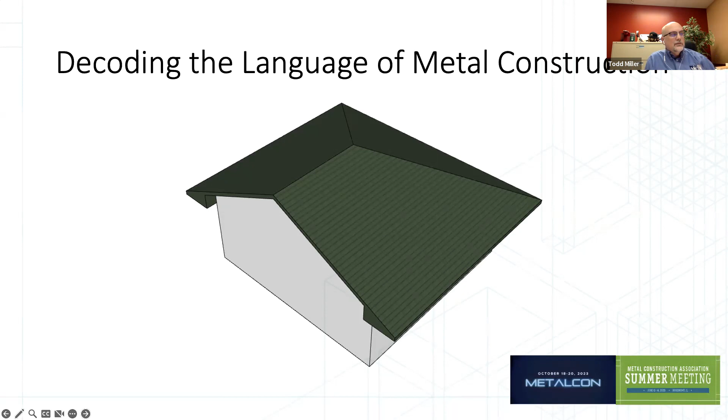As we go around the roof, we can start with some basic roofing terminology. Here you see some basic parts of a roof pointed out, some on top such as the hip, rake trim, eave trim, and ridge trim. But you also have areas underneath, like the soffit and the overhangs, and open gables which have overhangs and soffits as well.

There's something pointed out there called a cornice, and I hear those called about 10,000 different things—wraparounds, Victorian this and that. There's all kinds of terms used for some of those decorative areas that might be on a roof.

But then, in the field panel, at least in the metal industry, we either have a metal vertical panel or a metal shingle panel used in the field areas of the roof.

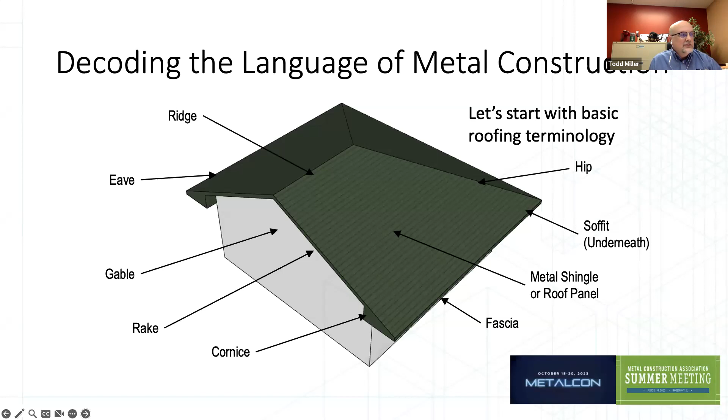Looking a bit further at the roof, on a hip and valley roof we're pointing out where the hips, valleys, and ridges are.

One thing I wanted to point out is that sometimes folks ask me, looking at a roof in a northern climate, what are those little pointy things at the bottom of the roof sticking up? Well, those are snow guards, and there also can be snow rails and different ways of doing that, but basically those are all systems of snow management. Metal roofs are fairly well known for shedding snow loads.

A lot of times what happens is you get a snow load on the roof and the sun comes out, generating a little radiant heat that passes through the snow, hits the metal, warms it up, and as it reflects back out, the snow load releases and tends to slide all at once—a bit like when your car engine heats up the hood and the snow suddenly lets loose.

But that's only if you're bad like me and you drive around with tons of snow on your car, which isn't the smartest idea. But anyway...

So we use these snow guards, typically staggered over areas of the perimeter of the roof you want to protect—you want to protect doorways to keep from blocking them, and you may also want to protect delicate shrubbery or statuary that may be in the firing range of snow sliding off the roof. So that's what snow guards are.

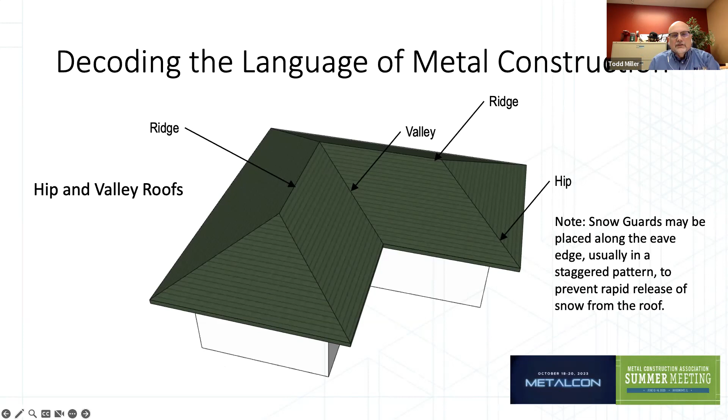So let's dig a little deeper here and look at the different types of metal roof panels. Again, some of these similar terms would apply to wall panels as well.

We're going to start by talking about snap lock standing seam. These are panels typically 12 to 18 inches wide, with a raised rib or raised seam—a standing seam—in between the panels.

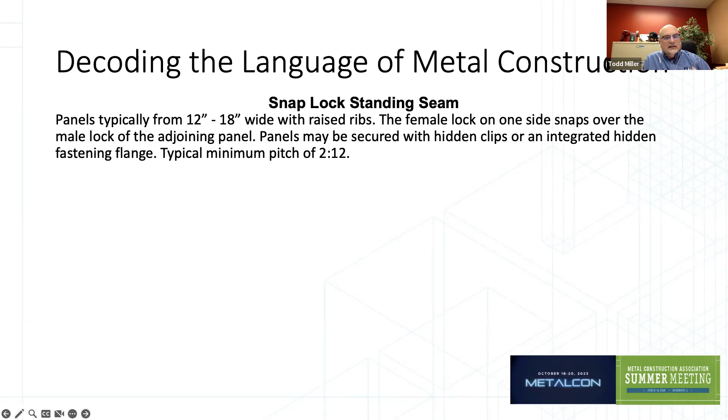When they're installed, the female lock on one side of the panel snaps over the male lock of the adjoining panel, and the panels may be secured either with hidden clips that attach to that male lock and are fastened to the roof deck, or some versions of snap lock standing seams have a hidden fastening flange with slotted holes that screws would go through. We oftentimes call those nail hems, but we don't really use nails through them, we use screws. Typical minimum pitch for a snap lock standing seam is 2 in 12.

But then we've got mechanical seam standing seam, very similar to the snap lock, except the panels are put on the roof, and rather than being snapped together, you run some sort of seaming machine, or old school guys do it with tongs, to mechanically fold that interlock into a watertight seam. One benefit of that type of seam is it can be watertight down to very low pitch, even as low as 1/4 in 12. These panels tend to vary a bit in width, probably on the wider end, maybe 16 to 20 inches for that type of panel. But once again, all the fasteners are concealed. A mechanical seam standing seam is going to have clip fasteners rather than that fastening flange I spoke of earlier with the snap lock variant.

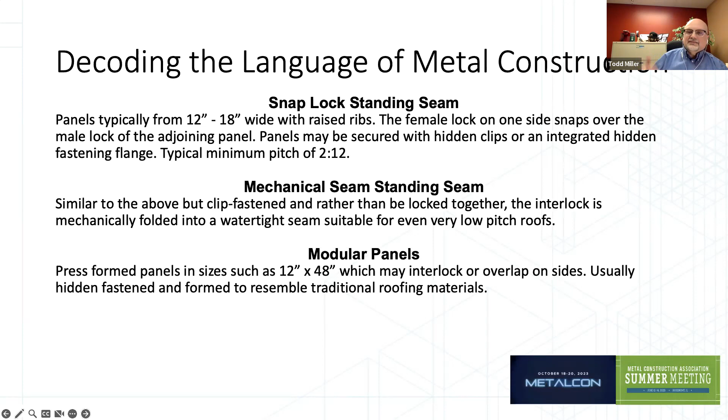So then we also have modular panels available in the metal roof industry, and these are actually press formed panels. There are a lot of different producers, and they all have different designs and dimensions. A real common dimension would be something maybe in the 12-inch by 48-inch range, so 12 inches top to bottom, 48 side to side. The panels either interlock or overlap on their sides. You've got some panels that interlock on all sides, some that overlap on all sides, and some that overlap on 2 sides and interlock on the other 2 sides, so a lot of variants out there. Usually with modular panels they have hidden fasteners, not always, but usually. And a lot of times these panels are press formed to look like more traditional roofing materials, stamped to look like slate, wood shakes or shingles, or even barrel tile.

And then finally, another type of metal roof panel, and I don't have these in any particular order, is what we call exposed fastener panels, or through fasten panels. These are basically sheets of corrugated metal in various profiles, like R panel, PBR panel, 5V crimp, other ag panel, and other profiles. They're basically secured to the roof with screws driven right through the panels. Those screws then have a rubber grommet or washer on them to keep water from infiltrating around the screw hole. So those are the 4 basic types of metal roof panels, and you get similar variants available on the wall side as well.

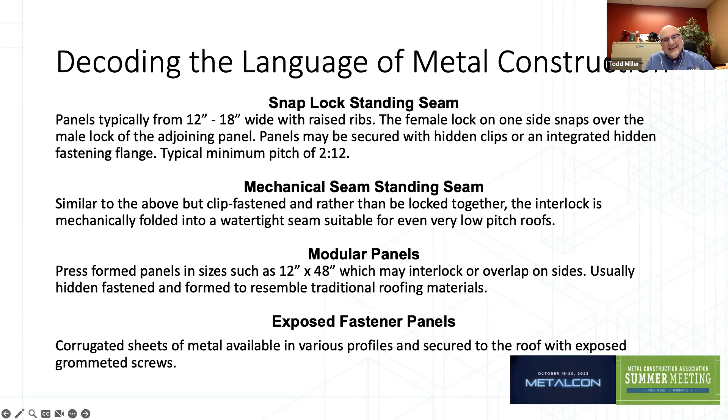A little bit larger term when looking at these types of panels is structural versus architectural panels, and you'll hear those terms thrown around on occasion. Structural panels are panels that do not require solid decking underneath of them, so they can literally span over the trusses and other structural members of the building. They can free span over those structural members without solid decking underneath. Architectural panels, also sometimes called non-structural panels, on the other hand, do require some sort of solid decking underneath of them.

So just for clarification here, most of the modular panels being made are architectural panels, meaning they do require solid decking. Solid decking, of course, can typically be wood, such as CDX plywood or OSB, or it can also be a metal deck. Another option we run into on older structures sometimes is the roof deck is dimensional lumber, but it's what I call closely fitted—the gaps between the boards maybe 1/4 inch or so, but there are no significant gaps between the boards. And then you've got battens.

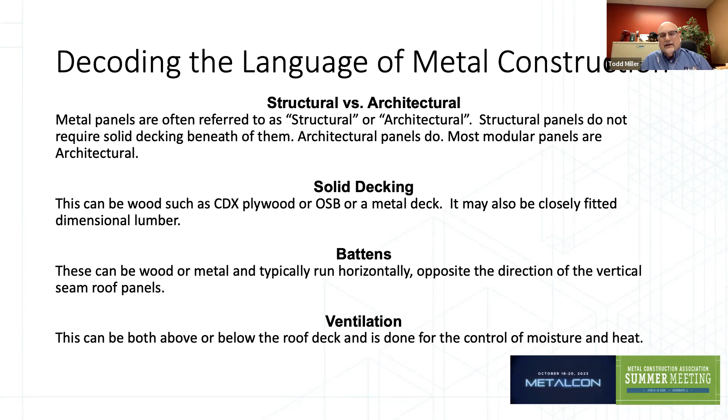Ventilation can be done above the deck, which we call above sheathing ventilation, or ASV. Or ventilation can also be the more typical setup, which would be ventilation in the actual attic space beneath the roof deck.

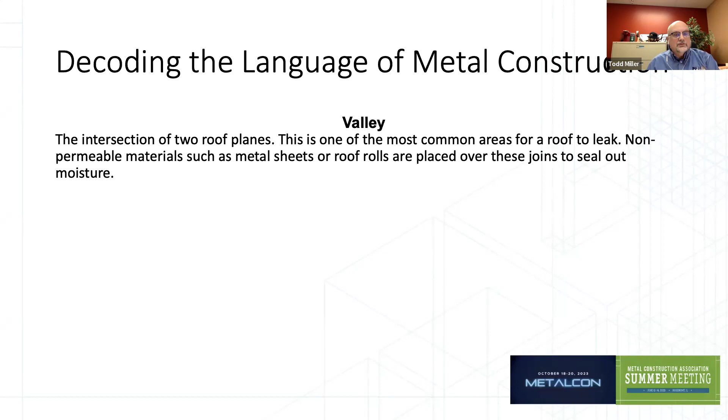A few other terms: valleys on a roof. The valley is the intersection of two roof planes, which we saw on that L-shaped building roof drawing earlier. Valleys can be a common area for roof leaks to occur, so typically on a metal roof they'll line that valley with some sort of matching metal that matches the rest of the roof. There are also a couple of variants of valleys: open valleys and closed valleys.

Open valleys typically have a valley pan put down and then a cleat on both sides of the center of the valley. The panels come into that cleat and lock over it. We call this open because everything's out in the open, nothing is concealed.

On the other hand, a closed valley is more like two J channels back to back in the valley that the panels are received into, or something like that. Closed valleys create a little bit of closure to help protect against weather, but the problem is they can also be prone to clogging with debris, since anything that ends up on the roof is going to end up in that valley eventually, just because gravity carries it there.

If you've got a valley system with closed channels, such as J channel type areas, those areas might collect debris, which could be tree leaves, pine needles, ice, or snow.

And then finally, we also have Death Valley. Oh wait, that's a really hot, dry place in Central California. That has nothing to do with roofing, although we do have dead valleys.

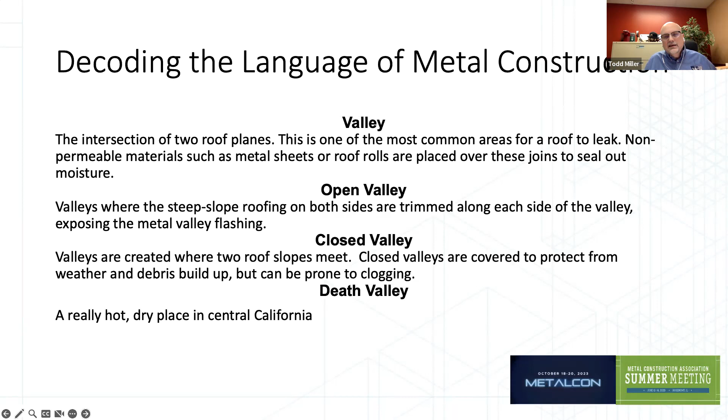Dead valleys are eave to eave situations, which can be nasty critters to work with. But again, typically you're going to line a dead valley with metal to match the rest of the roof. Ideally you'd put some sort of saddle or cricket in the middle of that dead valley to help push the water one way or the other, or perhaps both ways. And there's our Death Valley sign.

Let's look at some other terms. Flashing is really a generic term used to refer to pieces of metal used to keep water from going into a joint. So, for example, if you've got a roof that abuts a wall, or runs into a chimney, or runs into a skylight, those are areas where you're going to flash.

One interesting thing about metal roofing: a lot of times with traditional shingle roofs, you'll see flashing on walls called step flashing, small 8x8 pieces of flashing stepped down that protrusion, whatever it is. Typically in metal roofing, we actually use lineal pieces, so those would be flashed with a continuous lineal piece rather than those small step flashings.

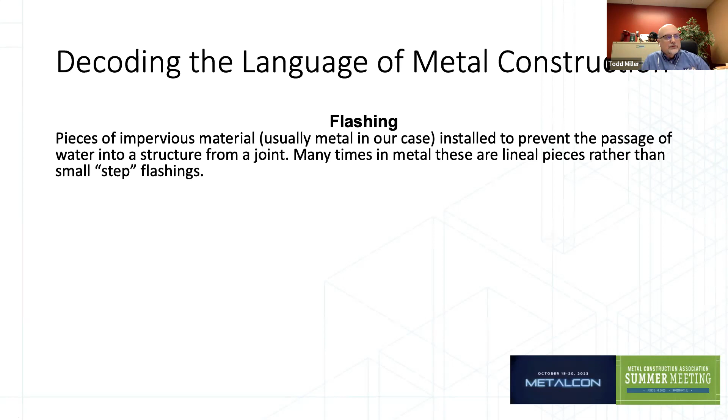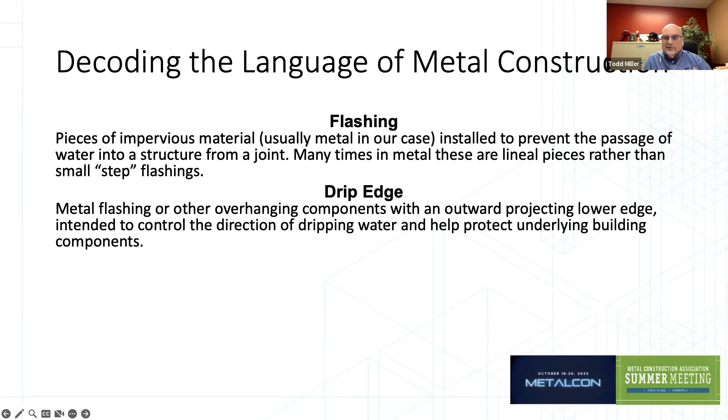Drip edge is at the bottom edge of the roof, basically to direct the water as it exits the roof someplace, hopefully away from the building. If there are gutters or some other kind of water control on the roof, the drip edge is going to direct that water into the gutters. Cleats, we'll look at a picture of those in a second, but cleats are basically a method of being able to put trims on a roof without any exposed fasteners.

Finally, I want to talk about underlayment. Underlayment is typically used on a roof being installed over solid decking, and it's a water resistant or waterproof barrier installed directly over the deck, underneath the roofing materials. It provides an added layer of protection in the event of severe weather. Sometimes metal roof installs take a little bit of time, so you want to make sure that roof is protected by a good underlayment.

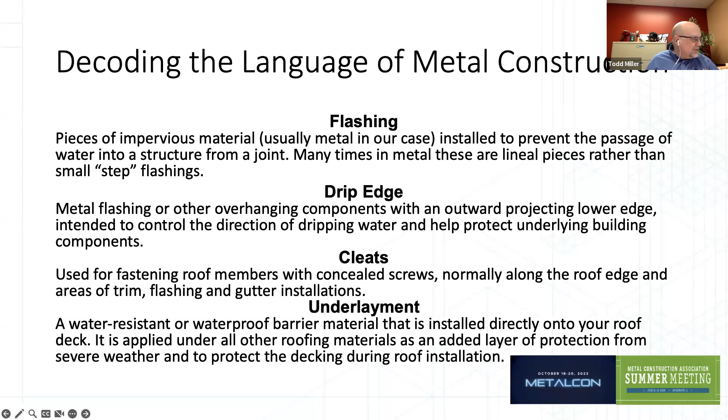During the process of installing the metal panels as well. A lot of the trend in metal roofing in recent years has been toward synthetic or polymer-based underlayments. These are still mechanically fastened, so you nail through them, typically using plastic cap or roofing nails. But they are not the old asphaltic felt underlayments, so they ain't your grandfather's underlayment, I guess you'd say.

We also often, as required by code, use ice and water shield around the perimeter of the roof, maybe up the valleys, maybe even up the gables. One of the very important things with ice and water shield beneath metal roofs is to use a smooth surface or a rubberized surface ice and water shield, not a granulated or sanded surface underlayment.

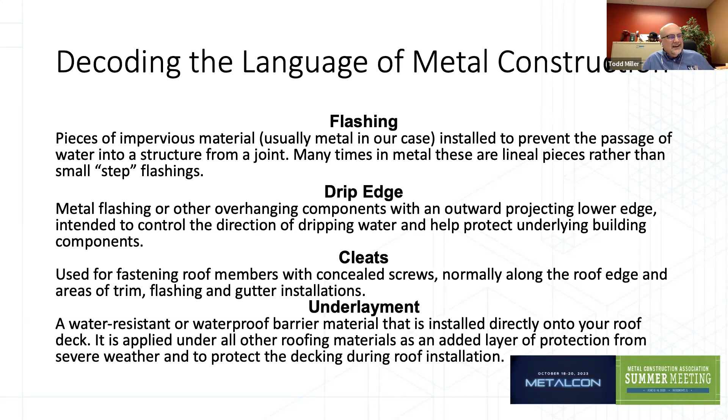The problem with granulated and sanded surfaces is, as the metal panels sit there and expand and contract with some thermal movement against that abrasive surface, it's going to scratch the backside of the metal roof, which could cause problems down the road. So you want to make sure your underlayments always have a smooth surface. Another reason is you want to make sure your metal panels don't end up sticking to the underlayment, because with expansion and contraction, it could tear it or cause it to bunch up.

So here's that cleat deal I was talking about. Nice drawing here Bob made with an eave detail where they've got a cleat. You see that lower piece there that the screw goes through, being driven into the fascia—that is the cleat. And the drip edge snaps over the cleat on the bottom edge. The drip edge is screwed into the roof deck in a concealed area. This allows you to have a nice drip edge with absolutely no exposed fasteners, and it's held firmly in place, which helps a great deal with wind uplift, making sure the drip edge doesn't blow up on you and cause wind infiltration problems.

Hey, thank you, Todd. If you just back up one slide, I did want to point out one thing.

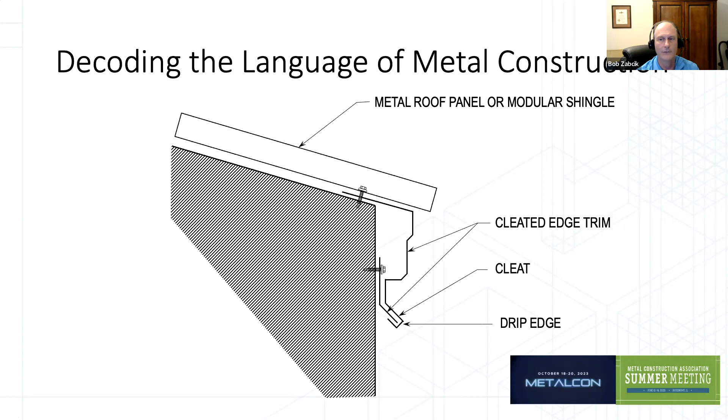Cleats are important, as Todd said, not just to conceal fasteners, but they also provide a means to address linear expansion and contraction without creating a binding situation at the fastener. I also wanted to mention, and this is my fault, I'll own it and fix it, but I've got the arrows swapped. The cleat is actually pointing to the cleated edge trim, and the second leader for the cleat edge trim is actually pointed to the cleat. So I'll fix that little hiccup in the slides here. That's one thing I wanted to point out, so thank you for that.

And yeah, I was going to get into the underlying materials and talk a little bit about paints and finishes. This stuff has been, it's old terminology in this industry. We've used it forever, but it's funny that as we've gone along, some of these definitions may not be exactly what you think.

Gauge is a good example of this. I've very carefully worded this definition: a numeric identifier for steel less than 3/16 of an inch thick, and that's actually called out in a couple of different standards. Above 3/16 inch, you use the thickness expressed in fractional inches, but below that you use this gauge identifier. A smaller gauge number means a thicker steel, and I've got some examples on the next slide. Also, gauge represents the thickness of the uncoated steel—the metallic and paint coatings add to this.

Now, what is not called out here is that there is actually not a consensus-based written standard that says 26 gauge is equal to X millimeters or fractional mils or fractional inches. That does not exist. A big reason why is that although 26 gauge from different manufacturers is generally very close in decimal thickness, they won't match exactly. The reason is that when this terminology was evolving, there were really two main steel manufacturers in the United States, US Steel and Bethlehem.

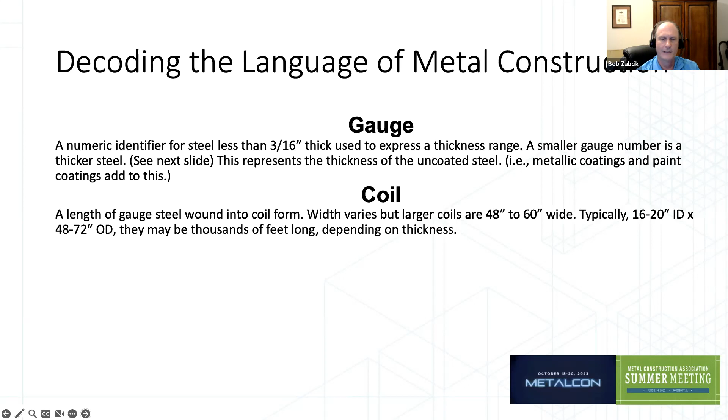But we're talking about the base coils here - usually an interior diameter of 16 to 20 inches, an outer diameter of 48 to 72 inches. If you do the math on that, we're talking about materials that are 0.025 to 0.03 inches thick. That's a whole lot of material - they can be thousands of feet long rolled up.

And then there's flat stock. Also sounds obvious, but there are some interesting things you may not be aware of. Most flat metal panels come from flat stock, but flat stock comes from coil. And when you wind coil, those dimensions - the interior diameter and outer diameter - are carefully chosen based on the thickness of material, so that the interior winds of that coil don't actually reach the elastic limit, and there shouldn't be any memory.

In other words, the coil trying to take back its round form. But of course, if it sits in a banded coil position long enough, it will have some memory to it. So you actually have to decoil or flatten material for flat stock - we do that in an inline process in this industry quite often. That's really the difference between gauge and how these three interrelate: gauge material, coil, and flat stock.

We'll ship flat stock to make special pieces in the field, or we'll make unique boxes, trim boxes, cornices, like we saw earlier, out of those materials instead of from coil. Coil generally is used to produce panels or some type of blank for other pieces of material made from it. So some of that terminology does cross over - that's why I wanted to bring that out.

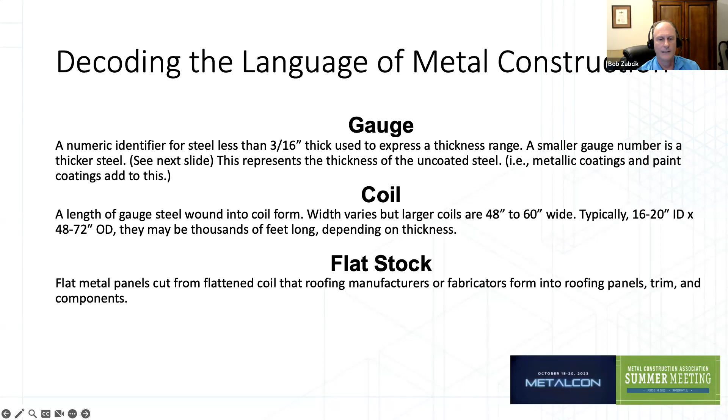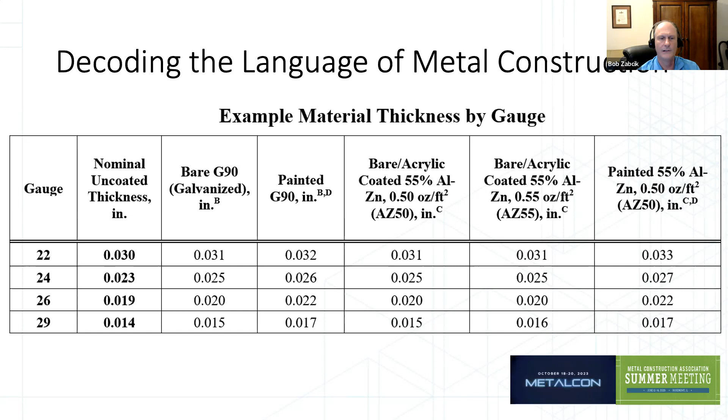The base material thicknesses are generally speaking the same, and that's what the dark numbers are. But when I add the different coatings and materials to them, I get different thicknesses based on what that coating is. This just shows you how that varies versus the most common gauges we see in this industry, which are 22, 24, 26, and 29 gauge. Again, these are decimal inches here - you could convert those to millimeters if you want.

And those coils, generally speaking, are either bare, galvanized, or galvalume, or they're painted - which leads us to our next term, Kynar.

So a little multiple choice for you. Is Kynar, on Star Trek, a cross between a Klingon and a Vulcan? Is it a paint system typically used on top of galvalume or galvanized steel or aluminum, widely recognized as a high quality finish, usually carrying a chalk and fade warranty? Or C, a small island in the southern Indian Ocean? If you can't get this one, I can't help you.

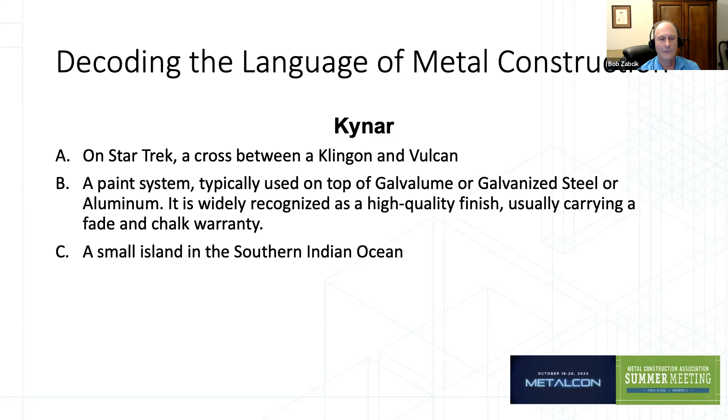The answer here is obviously B. But just for grins, I wanted to put that out there, because when I see the word Kynar, those are the two things that popped into my mind: a Klingon and a Vulcan - it kind of fits together. So there you go. Gotta love Spock - he's one of my favorite characters on any television show or movie ever.

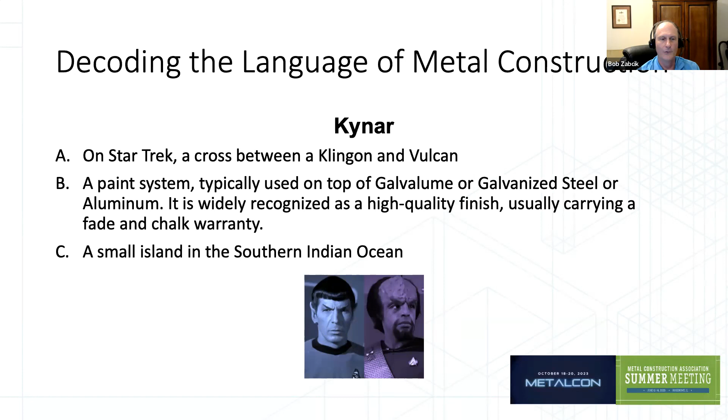All right, next slide, please.

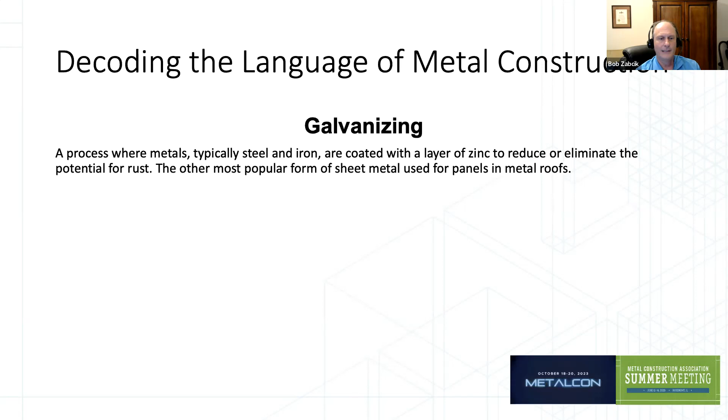So I've talked a lot about galvanizing and galvalume a little bit. Let's just talk a little bit about metals in general.

We've all probably heard the term similar or dissimilar metals. I haven't put those in the slide here because hopefully you remember from high school chemistry what those are. But really what it comes down to is dissimilar metals are metals which, when put together in the presence of an electrolyte, a liquid media able to transmit electrons, generate some type of corrosion. Similar metals, when put together in an electrolyte, there might be some corrosion, but the two metals don't assist each other in their respective corrosive processes.

That's really one of the key things we're accomplishing with galvanizing. It's typically a process where metals, typically steel and iron, are coated with a layer of zinc to reduce or eliminate the potential for rust. Maybe most people know this, but in case you don't, zinc is a sacrificial coating, which means the zinc corrodes instead of the iron. This is what makes it very widely used for exterior applications, like sheet metal used for panels and roofs.

Now, we generally don't use bare galvanized in most commercial products. Ag products, we do use a lot of bare galvanized. There are actually times, certain corrosive environments, where bare galvanizing actually works better, but those are pretty unique and rare. Generally speaking, when we have plain zinc galvanized material, we're coating it with a Kynar or some other type of paint system.

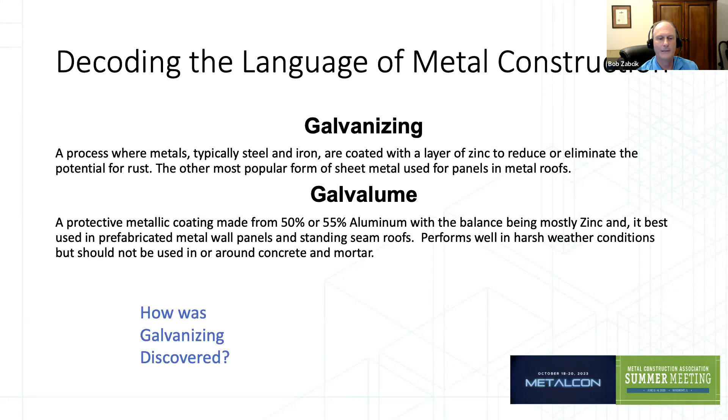So that's the process of galvanizing and how dissimilar metals work. There's a very interesting story here - I'm going to get a little off topic, but I think you'll find this interesting. As far as I can tell, it's true. I've done a lot of research, and I think this is commonly accepted.

This gentleman, his name is Luigi Galvani - excuse me - he was an Italian chemist in the late 18th century, about 1780. You know how these days, if we have a sick loved one, what do we do for them? Chicken noodle soup, right? Well, I guess if you're a chemist in Italy in 1780, you don't make chicken soup, you make frog soup.

I've had turtle soup, I've never had frog soup, and honestly I'm not going to rush out and try it. But supposedly it has great healing powers, or at least was thought to at the time. So being the doting husband that he was, Mr. Galvani runs out and grabs some live frogs from a local market, brings them to his house, and harvests the legs off the frogs. He skins them and puts a little salt on them - probably not to season them, but to dehydrate them.

Then he hangs them up - and this is where it gets pertinent - on a copper wire against his window. That window was open, but it had iron bars on it. Well, copper and iron are dissimilar metals, and of course there's salt and moisture on the frog legs, so we have an electrolyte. Lo and behold, the wind starts to blow, and the frog legs touch the iron.

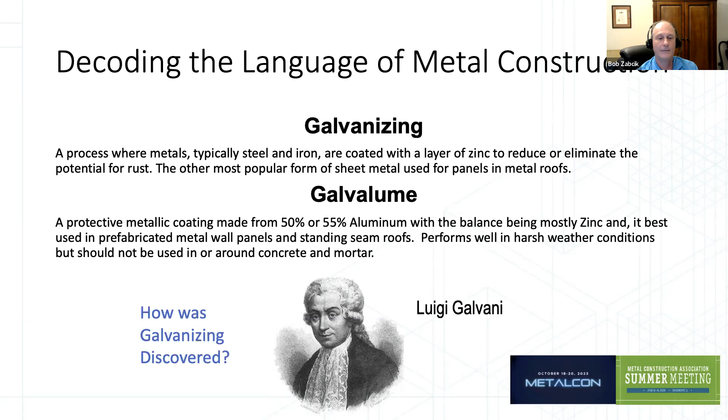There's some useless information you can pass on to your kids at dinner time - and go try frog soup, who knows! So with that, Todd, I'll turn you over to cover some manufacturing terms, and then as I understand we're at about 20 minutes to go, so I think we're doing all right on time. When you're done, Todd will kick this back over to me and I'll get into some of the more common acronyms we run into, and that should bring us on home. So please take over, Todd.

Thanks, Bob. I don't know if I have to live in a world that's powered by frogs - I think maybe I'll live without power. I did realize, though, I missed my perfect opportunity when you asked what do you do when a loved one is sick. I really should have said I check and make sure their insurance is paid up. Yeah, bingo - completely missed that one.

Okay, let's look at some others. Oh, we got another multiple choice here. So, what is a reverse bend?

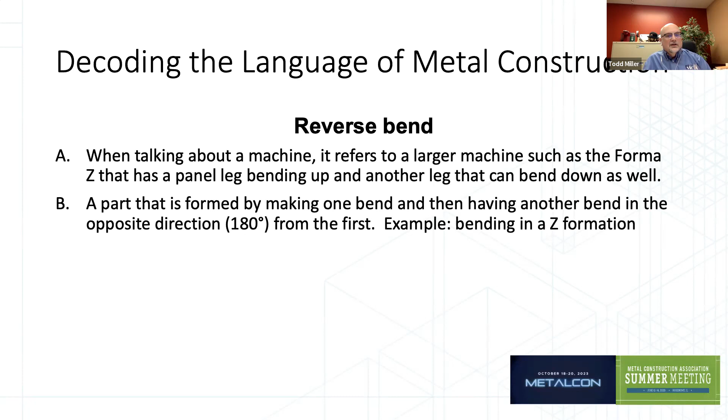Could it be A, when talking about a machine that offers reverse bends? It refers to a large machine, such as Schlebach's Forma Z, that has a panel leg bending up and another leg that can bend down as well, so there's double folding action going on. Or could it be B, a part formed by making one bend and then another bend in the opposite direction, such as a Z formation? Or could it be C, a road that turns suddenly more than 170 degrees? Well, the correct answer is actually D.

It could be both A and B for reverse bend. So it's a particular type of machine, but it also refers to a particular product profile or trim profile as well.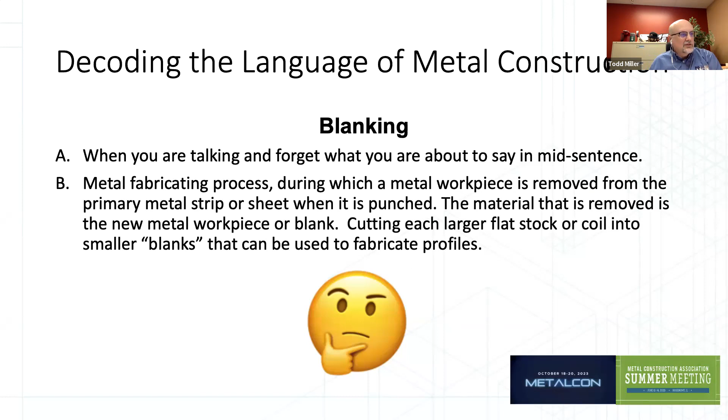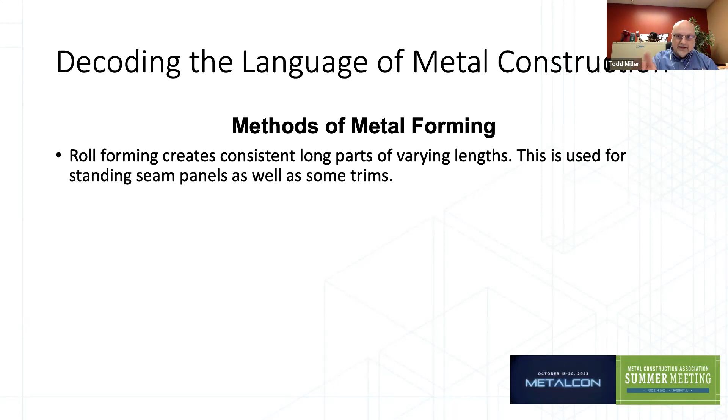So let's look at methods of metal forming. There are three primary types of ways in which metal is formed. One is roll forming. Think of that guy who brings a seamless gutter machine to your house and rolls gutter out of a continuous coil of metal - that's roll forming. Roll forming creates consistent long parts of whatever length you want, and oftentimes the machines are programmable. Roll forming would be the method used for standing seam panels as well as some trims. The big thing with roll forming is everything is lineal - it's one direction, one straight consistent part.

Another method of forming metal consists of press brakes, folders, or hand brakes. These are used to create specific length trims by putting a blank into it and then bending it as needed. Compared to roll forming, a press brake or folder can be programmed, or a hand brake can be manually operated, to create pitch-specific parts or even tapered parts. With a roll former, everything is one dimension, continuous long parts. The variety we get with a press brake is the ability to do more customized parts that may be specific to the pitch of the roof, and maybe tapered parts - you may have valley pans that are tapered so that one can nest into the other when lapping valley pans up the length of a valley.

The last method of metal forming common in our industry is stamping. These are large, high tonnage stamping presses used for producing various modular panels, as we call them - the various metal shingles, slates, and tiles we talked about earlier. There is tooling put inside the presses that creates those parts. The tooling may be transfer tooling, where parts have to be mechanically moved from one die to the next between hits. Or tooling can be progressive, where the part stays connected as it goes through the various stations of the die until the final finished product gets cut off at the end and thrown out of the machine at some ridiculously high rate of speed. Well, it does happen sometimes - so you've got a catcher on the end to catch those parts.

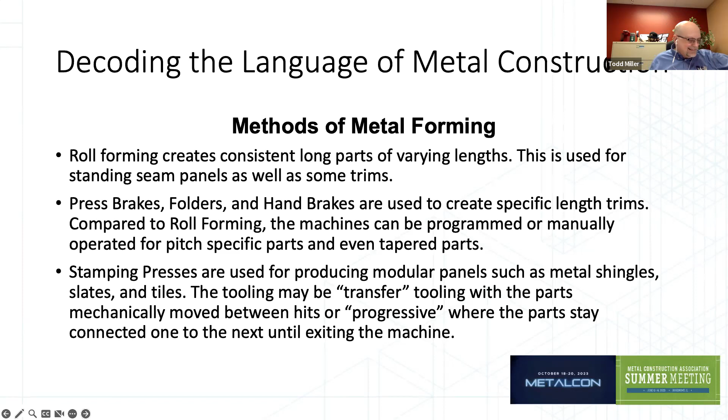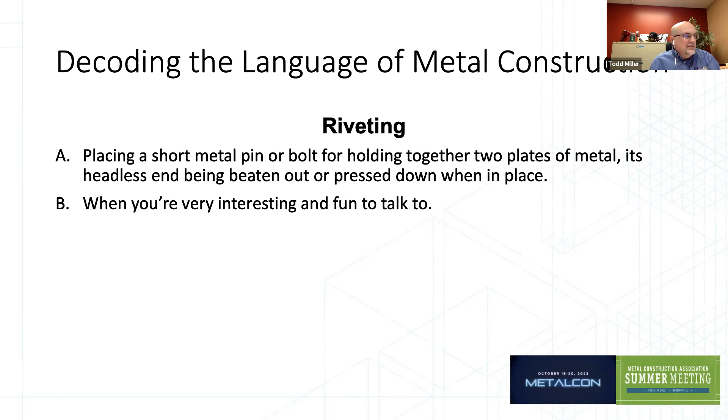Some other terms in metal construction - riveting. Here's another multiple choice. Riveting can be A, placing a short metal pin or bolt for holding together two plates of metal, the headless end being beaten out or pressed down once in place. Or is riveting B, when you're very interesting and fun to talk to, like Bob?

Thank you for that lie.

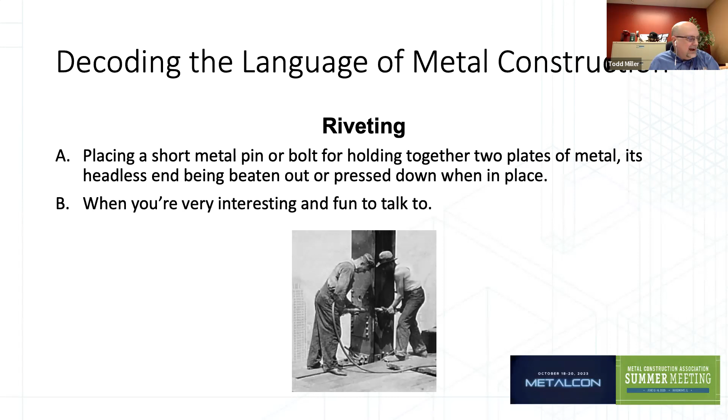I will say it could be A or B in this case, but as it pertains to metal and construction, it's probably A. So now we're going to turn over to alphabet soup and send it back to Bob to have acronym time.

Those folks who did that riveting in those scenarios, I think we've all seen pictures of the Empire State Building being erected, and other tall steel buildings in the early 30s. Those people were seriously hard workers and took a lot of dangerous chances in their jobs, and it's pretty amazing really to watch if you get a chance to see some of those few films that were made of that process.

I mentioned this earlier, and this is a big part of the impetus of this program. If you've been to an MCA meeting, you've heard me talk, and you've probably heard a gentleman I work closely with named Andy Williams, who's also our lead technical folks at MCA. We have council meetings and tech meetings. Our council meetings are about 45 minutes, our tech meetings are usually about an hour and a half, and we have a lot of research programs doing a lot of different things, and we're flying when we give these presentations. So I've been told many times, that's great, we appreciate what you're doing, but can you give us a cheat sheet on the acronyms you're using? So that's what I'm going to do.

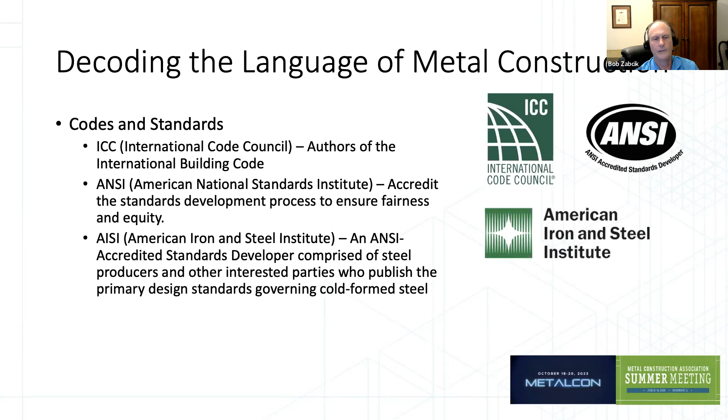One of the main ANSI accredited standards developers that we work with at MCA is the American Iron and Steel Institute. They produce a document called AISI S100, amongst many others, that dictates the structural design of cold form steel members made out of coil stock gauge material. In fact, this 3/16 dividing line actually originates in the AISC spec, but that's the dividing thickness between these two codes, generally speaking.

So we've worked very closely with AISI and others, and they have interest categories. They also have to announce certain types of development and committees that they're having, so that the public is aware that this is going on. Let me back up one more slide here.

So just like AISI does for steel, the Aluminum Association does similar for aluminum. We haven't talked so much about aluminum, but we make a lot of aluminum products. We make a lot of roofing material out of aluminum products, a lot of Metal Construction Association members do that.

The Aluminum Association essentially provides a similar service to their industry by developing ANSI-based accredited standards dictating aluminum design. There's their logo on the right-hand side.

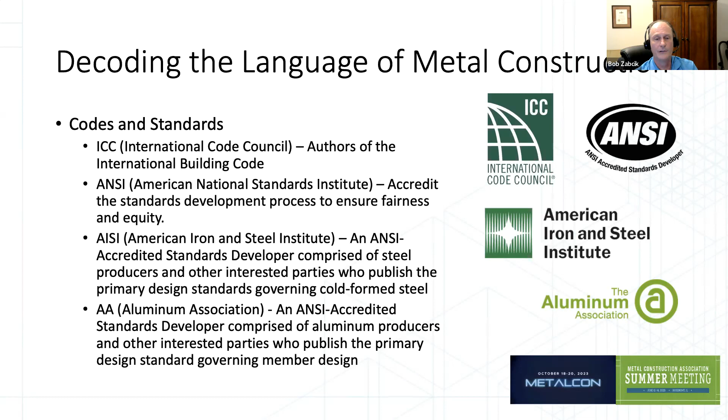Let's continue down this code and standards path. The National Fire Protection Association, or NFPA, is another group we monitor and work with closely. They're a developer of codes and standards revolving around fire protection, but they do a lot more than that—they have a model national code and standards for firefighter equipment and tools. None of that really affects the building industry, although it's interesting that the 75-foot limit you see, and certain fire limitations for roof height on certain types of fire protection, comes from the length of a typical ladder. So those are interrelated, and that's why NFPA sets a lot of standards that closely affect our product, particularly if it's insulated with some type of combustible material.

ASTM, the American Society for Testing and Materials—probably everybody's heard of this—is a massive organization that develops a gigantic library of standards. I'm not going to even try to tell you how many there are; they're easily in the thousands. They do standard specifications, guides, all kinds of things. Pretty much any material we've talked about, be it steel, is covered by an ASTM A series spec. They have an A series, B series, C series—generally speaking, the material series.

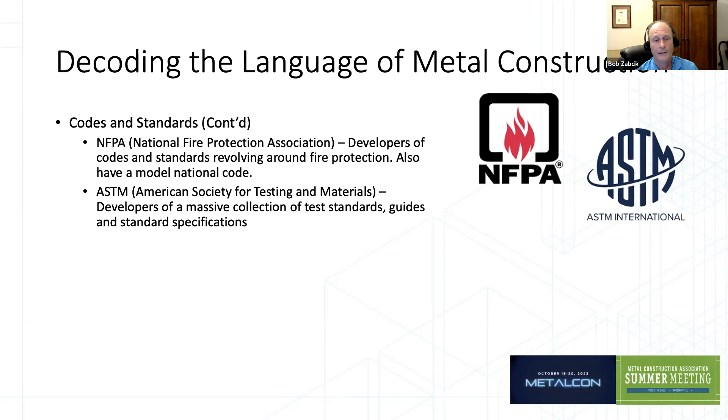C, D, and E cover different types of test processes and standards. If you were to go through the IBC and count, ASTM is cited more than any other organization, hundreds of times, for various things they do. So it's a very influential, important group, and I encourage a lot of people to join ASTM. It's a really interesting thing to do—a fun process to participate in, can be challenging, but it's your chance to guide the industry from your own perspective.

ASHRAE is very similar. Maybe it doesn't affect metal construction exactly, but remember, we have members who make insulated metal panels and other insulated products. Even members who don't make IMPs might sell insulation, so they concern themselves with this. The American Society of Heating, Refrigeration, and Air Conditioning Engineers—I'll only talk about what they do that affects us. They do a lot more than just make 90.1, but 90.1 is the standard governing minimum energy efficiency for commercial and multifamily residential buildings. It sets U factors for wall assemblies and equivalent R values, and it sets air infiltration standards.

90.1 also references the next group, the Cool Roof Rating Council, or CRRC, for cool roofing provisions. CRRC developed CRRC 100, the standard governing cool roofing and related measurements and rated aging properties. I'm actually on the CRRC technical committee, and we work with that standard virtually every time we meet. It's beginning to be adopted and looked at very closely all throughout the United States as people become concerned with heat island effect and how it relates to climate change.

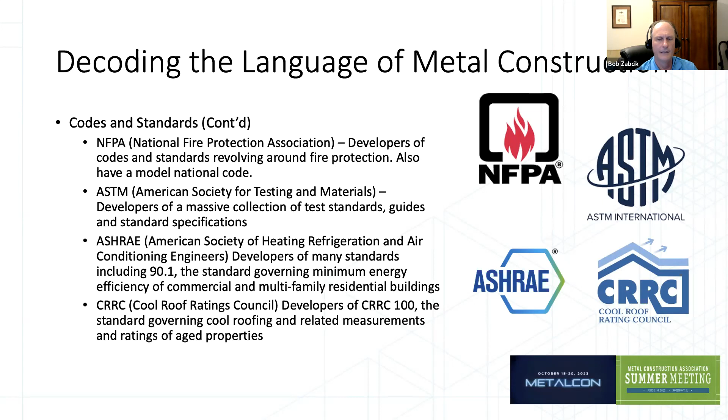Let's move on to groups that do certifications and listings, though they probably also do standards. UL is a good example—throw them in the bucket with the standards developers I just covered. But let's talk about certifications and listings in general first, as they're really two different things.

A certification is a statement from a third party who says that you have passed a test, or that you meet a standard, or that your spec or product meets a specification, and it certifies that. A listing is a certification plus some other stuff. Specifically, a listing means your certifications are listed on a publicly accessible, third-party hosted source, and those certifications also relate to a QC program—an annual inspection QC program—which verifies that the product being certified is being made at particular plants in conformance with that same standard. There's a third-party auditor who chases that down and makes sure it's all done. Why is that important? Not just public safety, though obviously that's the most important thing—it also has a lot to do with insurability.

If you want a building to be insurable, you need, generally speaking, to address a lot of UL standards. In fact, many of them are part of building code requirements. Insurability is a bit beyond what the code requires. I think you're all familiar with the old saying that the code defines the least performing building you can legally have. Even UL standards are cited a lot in the building code, but many go above and beyond the minimum requirements of the codes, and they do that for insurability. So major insurance underwriters will look for UL listed products in buildings, making sure they've been incorporated into design so they can provide greater levels of insurability.

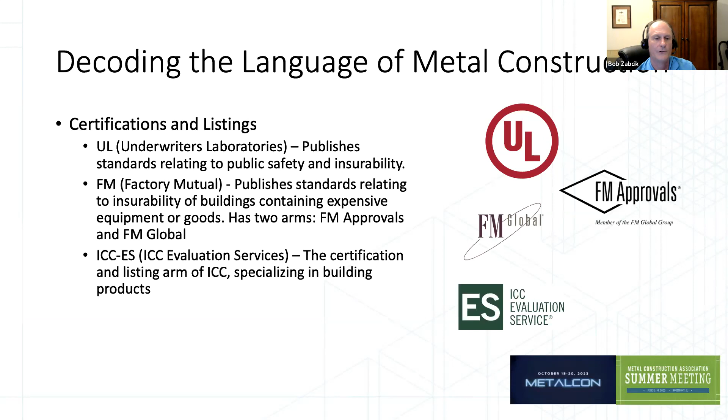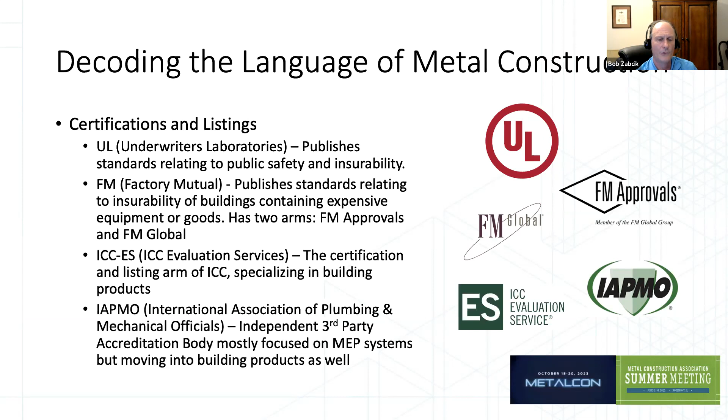And IAPMO, the International Association of Plumbing and Mechanical Officials. Big deal, what does that matter? Well, they are mostly focused on MEP systems, but they are moving into building products now. So you'll begin to see some building products listed under the IAPMO label. It's beginning to be more popular from what I see, still not anywhere near as popular as ICC-ES, but it is catching on a little bit more. You'll see it more often, but same function as far as building products are concerned.

Next slide, please. I'm going to wrap this up, and I think we're pretty much done. This may be the last slide.

You've probably heard of NFBA if you've done ag buildings - pole barns, you'll hear that saying. I won't go into what that is, but it's an interesting way to build a building, and they really work very well for agricultural structures. We don't have time to get into that, but they do publish those standards, and they've now been adopted in the building code.

I don't think NFBA is an ANSI accredited standard, but I believe they've used another ANSI accredited agency to canvass their standard. That's much like MCA has done with our edge metal tests - we used SPRI, the single ply roofing industry, for their canvassing process. So we're not an ANSI accredited standards developer, but we have an ANSI accredited standard, ANSI MCA FTS1, because we used somebody else's process. We partner with them and pay them money to host it for us.

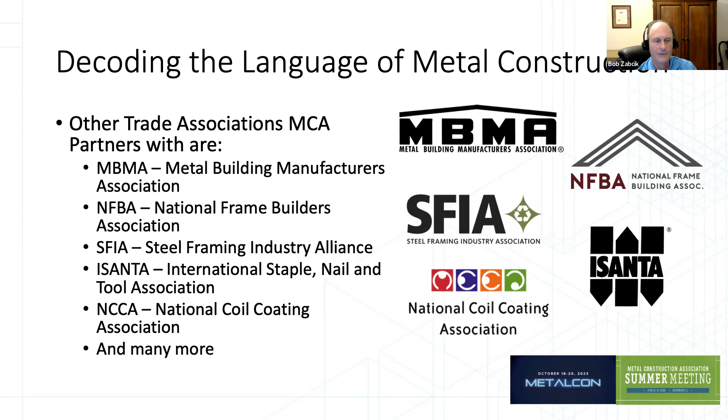And we work with many more associations, some of whom we work with are on this call today and I've missed mentioning them. I apologize, but we know who you are, and we appreciate all the work that you do helping us. We sure hope that at MCA we're helping you to that same level. So that is it, and I'm all done.